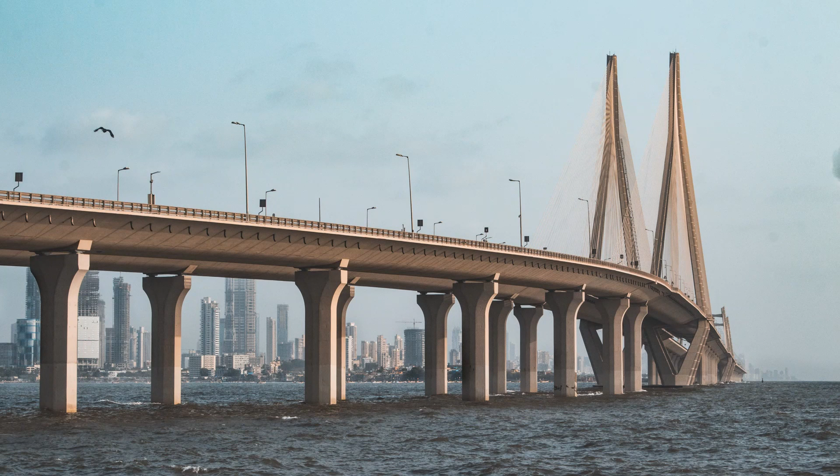For an outsider, basically what comes to mind after hearing the word Mumbai is Gateway of India, Marine Drive. But after the construction of Bandra Worli Sea Link, this structure is also one of the pictures that most people think about. And yes, Bandra Worli Sea Link is a masterpiece showing India's excellence in civil engineering.

Before starting the technical information, let me give you some brief about Bandra Worli Sea Link. Most people know this structure as Bandra Worli Sea Link, but actually its official name is Rajiv Gandhi Sea Link, or Rajiv Gandhi Setu. It connects Bandra in Mumbai's suburban region to Worli, in the south region of Mumbai, so it's popularly known as Bandra Worli Sea Link. This bridge is owned and maintained by MSRDC, the Maharashtra State Road Development Corporation, and this sea link is constructed by one of India's oldest and renowned companies, HCC, Hindustan Construction Company.

The design of the Bandra Worli Sea Link is done by the UK-based consultants for MSRDC, and for this project, the best experts from around the world contributed and worked on the design and construction at several stages. The sea link connects Bandra to Worli, crossing the Mahim Bay through the Arabian Sea. Construction started in the year 2000 but actually accelerated in 2007 and was completed in 2010.

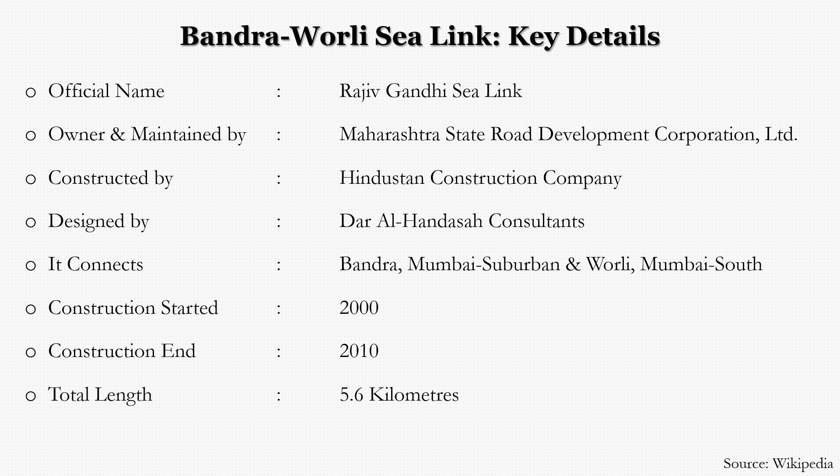The sea link is 5.6 kilometers long, which reduces travel time between Bandra and Worli during peak hours from 20-30 minutes to just 10 minutes.

Before I start the construction engineering aspects of the sea link, let me explain why this bridge is so important for covering a long distance in Mumbai's traffic in a short interval of time.

Mumbai is the capital of Maharashtra and the financial capital of India, and its central business district area is South Mumbai. But as urbanization happened over the last 50 years, people from all around India came to Mumbai, and because of the high price of land and lack of land in the Mumbai South region, people started living in the northern side of Mumbai and traveling daily to Mumbai South.

Therefore, the traffic in Mumbai from north to south is increasing day by day. In Mumbai, major traffic is handled by the Western Express Highway and Eastern Express Highway, with the Western Express Highway catering to 70% of the traffic. In the Mumbai suburban region, only Mahim Causeway is the road through which all travelers travel from Mumbai Western suburban to Mumbai South, and this road is always marked by heavy traffic.

So providing an efficient transportation system with minimum travel time was one of the major aims of this project, and the Bandra Worli Sea Link became one of the most highly recommended projects of all transport studies done for metropolitan regions.

So finally it was decided to build a sea link through the Arabian Sea, crossing the Mahim Bay from Bandra to Worli with an almost straight alignment, motivated to reduce traffic and accidents on Western Express Highway. Now let's see the details of the complete project.

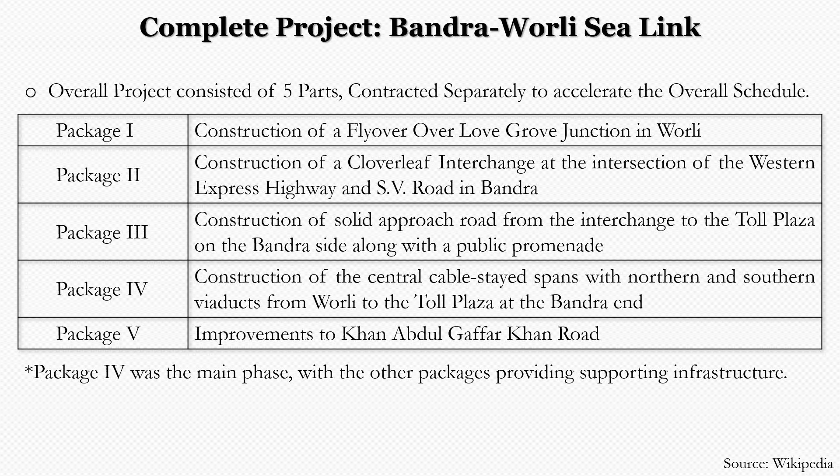The overall project consisted of 5 parts which were contracted separately to accelerate the overall schedule of the project. For ease of understanding, we'll see this on a map. Here is the part of the map of Mumbai, and here you can see all the parts of the project.

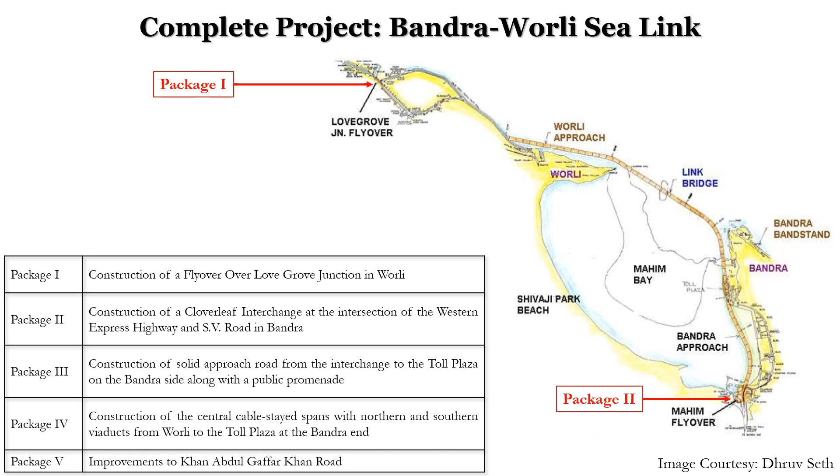Here it is, package 1 of the project, which is the Love Grove Junction flyover in Worli, 680 meters long and 8 meters wide. It is one of the big steps to the Bandra Worli Sea Link from the Worli side. Similar to the other side of the sea link, there is a Cloverleaf interchange at Mahim intersection, which is package 2 of this project.

The third package of this project is a solid approach road from Mahim interchange to Toll Plaza on the Bandra side, along with a public promenade. The main package of this project is package 4, which is the construction of the central cable-stayed spans with northern and southern viaducts from Worli to Toll Plaza at the Bandra end.

The fifth package of this project is the improvement to the Khan Abdul Gaffar Khan Road, which is from the Worli end of the sea link.

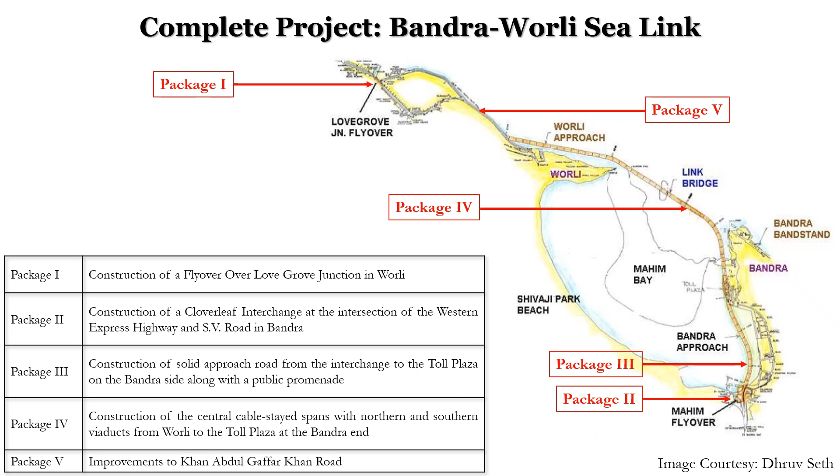Now let's see about the design of the Bandra Worli Sea Link. The design was consulted by DAR Consultants for MSRDC. The bridge is designed in accordance with IRC codes, that is Indian Roads Congress codes, and specifications conform to IRC standards, with supplementary specifications covering special items. The bridge is designed and built to withstand wind ranging up to 125 km per hour over the Arabian Sea.

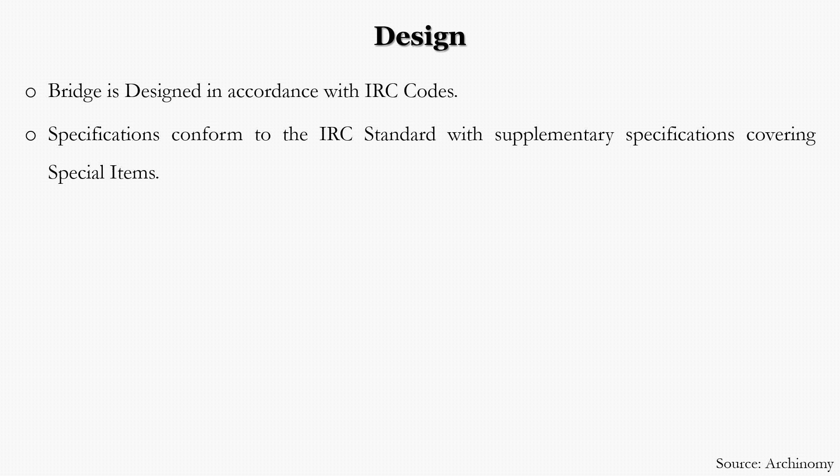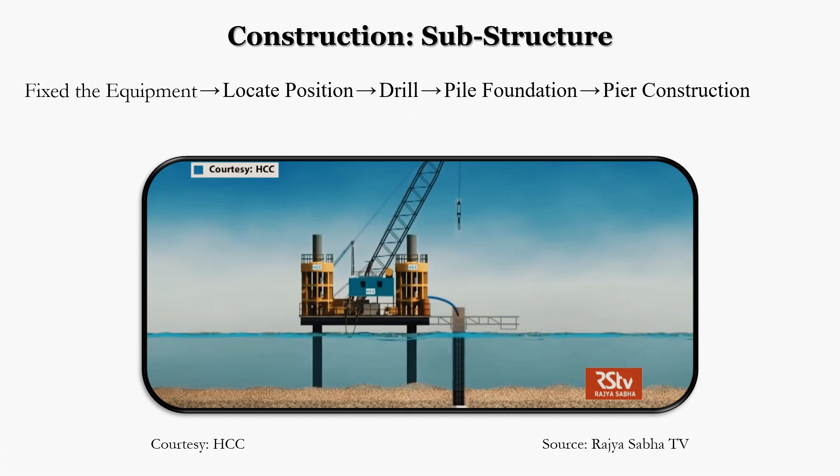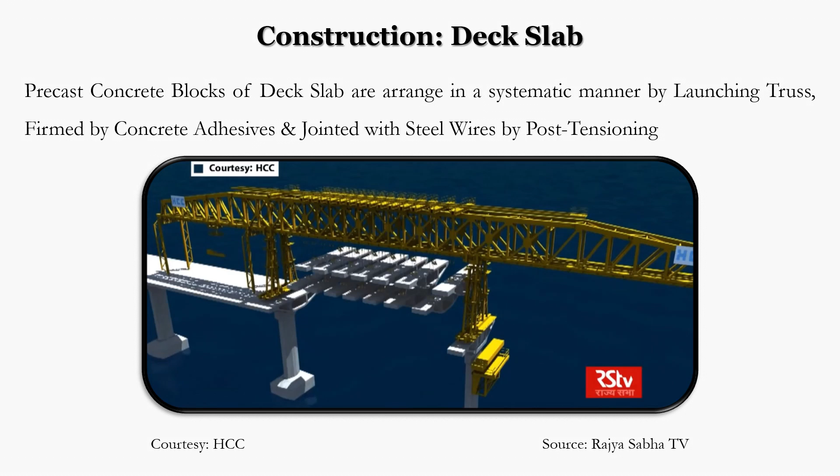Once the forward pier is constructed, prefabricated concrete blocks are laid by the giant launching trusses. There are a total of 15 segments of precast concrete blocks laid between two pillars, and these blocks are joined by concrete adhesives and steel wires through post tensioning.

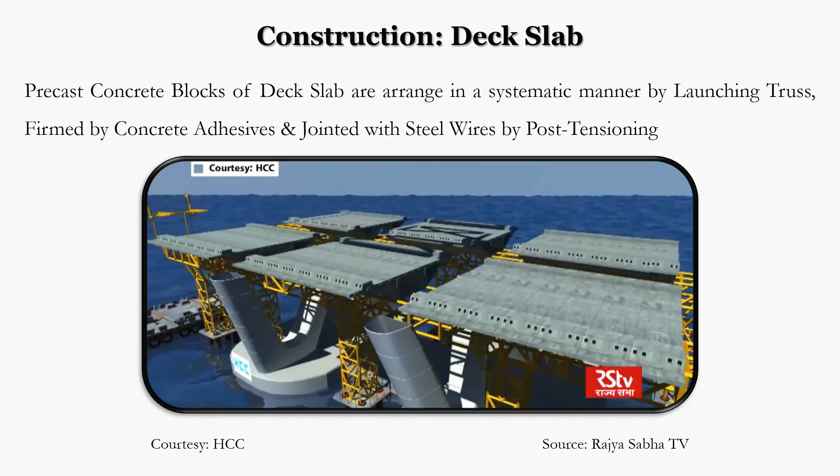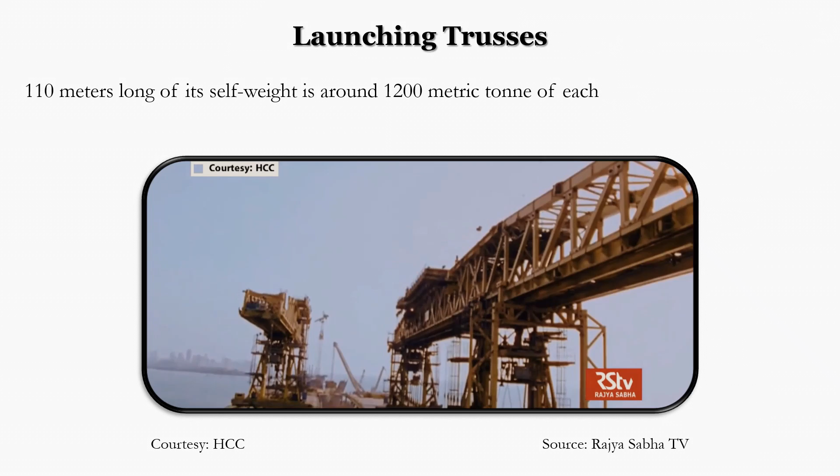Launching trusses have been assembled and calibrated to a high degree of precision. These launching trusses are 110 meters long and their self-weight is around 1200 metric tons each. These trusses crawl mechanically on the surface after the portion of deck is completed.

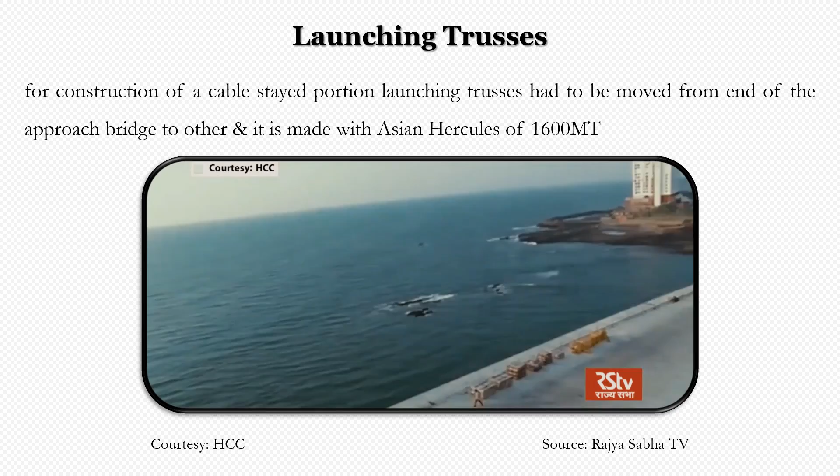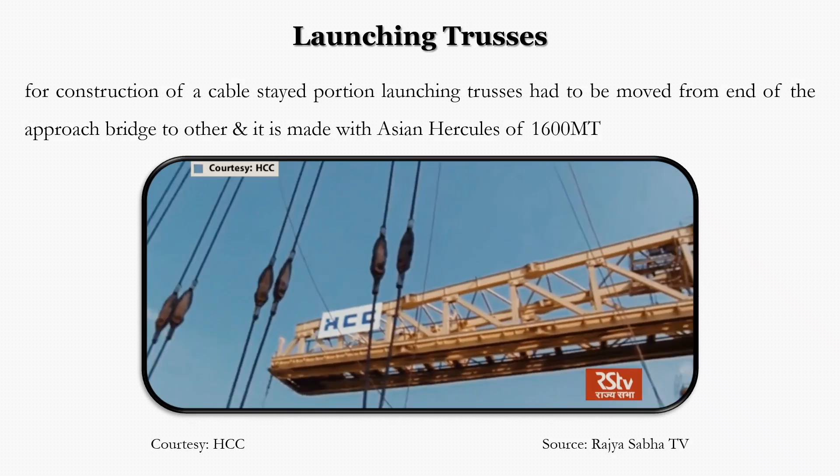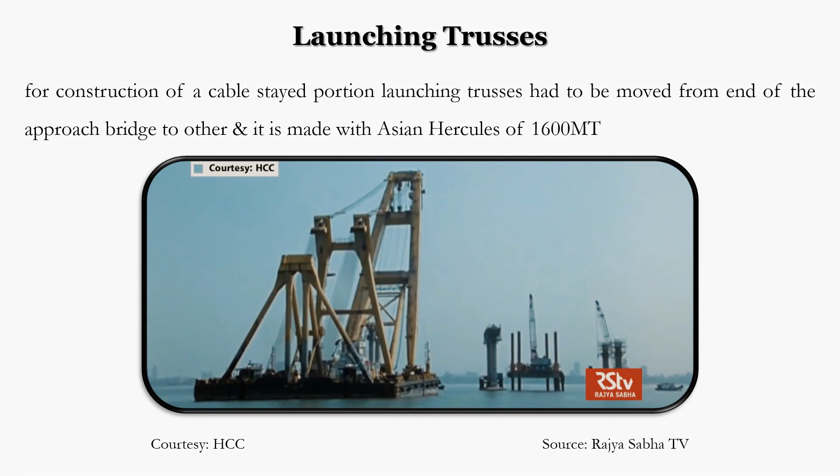But for building the cable-stayed portion of the bridge, these launching trusses had to move from one end of the approach bridge to the other, because the distance between the end pillar and the central pillar of the cable stay is 250 meters. This was a massive challenge, moving a 1200 metric ton launching truss from one position to another. HCC achieved this with the giant Asian Hercules, one of the biggest shear leg cranes in the world, which can lift up to 1600 metric tons. That made the task much easier for laying the two 250-meter-long decks of the cable-stayed portion of the bridge.

The cable-stay portion of the Bandra Worli Sea Link makes the structure more aesthetically pleasing. The sea link has two cable-stayed portions. The larger cable stay, close to the Bandra end, has approximately 600 meters of span with two clear channels of 250 meters each. The smaller cable stay at the Worli end has approximately 350 meters of span with a clear channel of 150 meters.

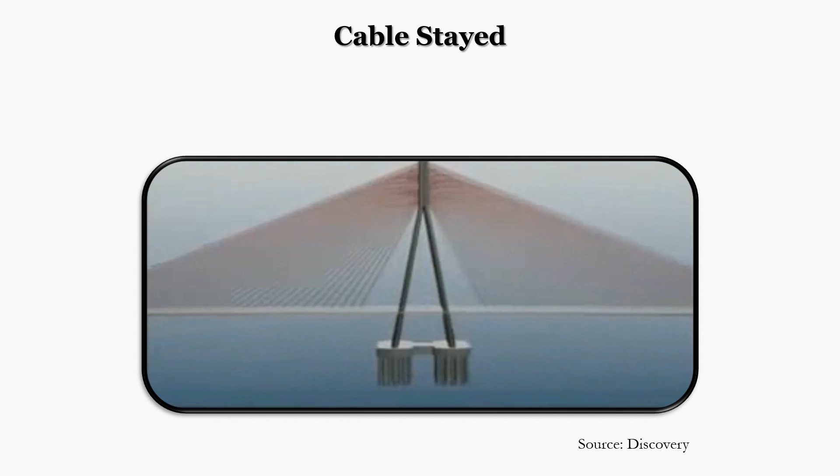Both portions are designed with absolute precision, keeping in mind dimensions, geology, and aerodynamics. In India, the Bandra Worli Sea Link is the first ever bridge over the sea to use the cable-stay technique for construction. For a clear understanding, let me explain the structural mechanism behind the cable-stay bridge.

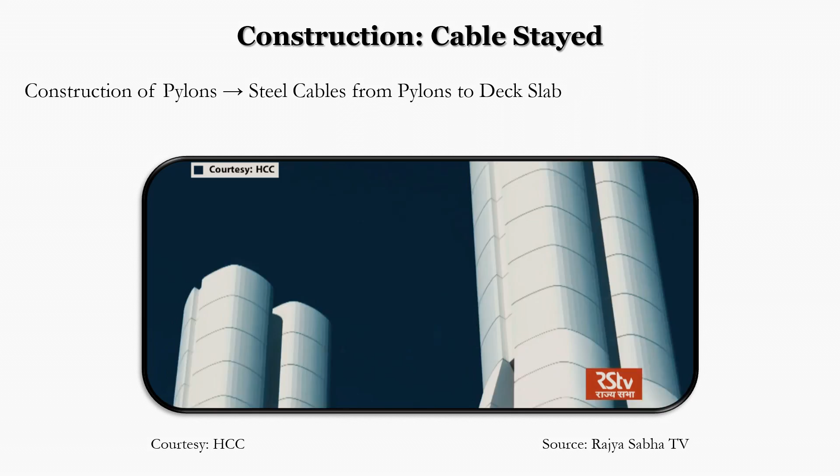It is basically pylons from which cables support the bridge deck, and in this way, the cables generate tension forces. You can find the piers at the bottom of the superstructure, but they are only supporting. What actually holds the deck are the steel cables from the pylons, and this is how the structural system works.

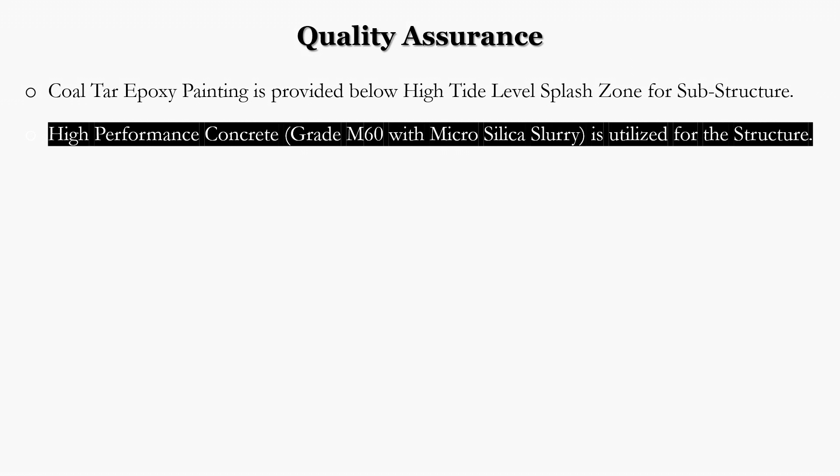Now let's see the factors considered for the quality assurance of the construction of the Bandra Worli Sea Link. For the substructure, coal tar epoxy painting is provided below the high tide level splash zones, while high performance concrete grade M60 with microsilica slurry is used for the construction of the structure. For the deck of the bridge, a 40mm thick high performance overlay is provided over the prestressed deck to function monolithically with the deck.

People from different organizations worked on the Bandra Worli Sea Link. MSRDC, the Maharashtra State Road Development Corporation Limited, is the owner of the project. Design was done by Dar Al-Handasah Consultants and Jacobs Engineering Group Incorporation. Geotechnical engineering work was done by Lachel Felice and Associates Incorporation. The sea link was constructed by one of India's oldest and most renowned construction companies, HCC, the Hindustan Construction Company. Expansion joints were handled by Mageba, a Swiss company providing civil engineering services, and launching was done by Freight Wings Private Limited. In addition, many others were also involved in the whole construction of the Bandra Worli Sea Link.

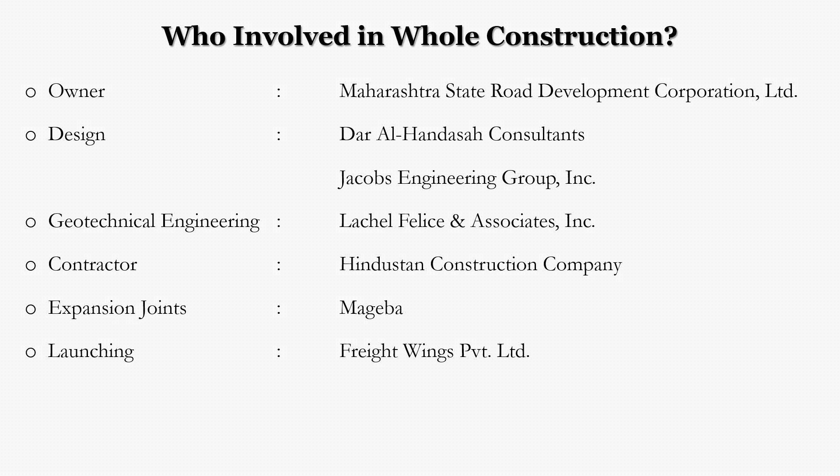So this is all about the construction of the Bandra Worli Sea Link. Now let's see the benefits of the project.

Although this sea link helps save time from busy and heavy traffic roadways, there are also other benefits of this project. There is a reduction in the chances of road accidents because of the almost straight alignment of the road and wider roads.

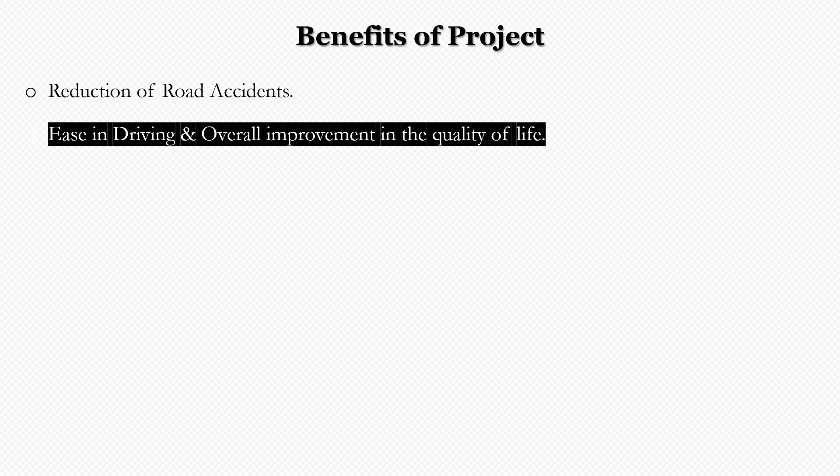Ease in driving with reduced mental tension, along with overall improvement in quality of life. Savings in vehicle operating cost to the tune of rupees 100 crores per annum due to reduction in congestion of existing roadways and lower vehicle operating cost on the bridge.

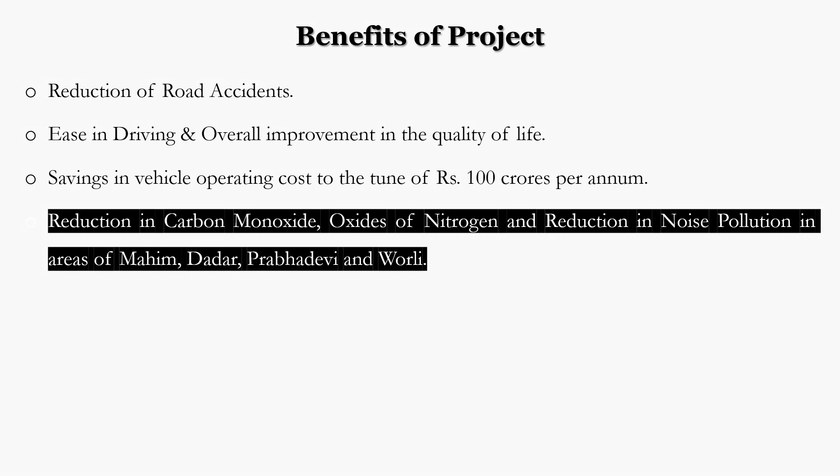Improvement in the environment, especially reduction in carbon monoxide and oxides of nitrogen, and reduction in noise pollution in areas of Mahim, Dadar, Prabhadevi, and Worli. This project has no adverse effect on the fisheries, marine life, and livelihood of fishermen. Lastly, proper landscaping measures along the approaches and promenade along the waterfront to enhance the environment of the area. Now we'll see about the bridge management system on the Bandra Worli Sea Link.

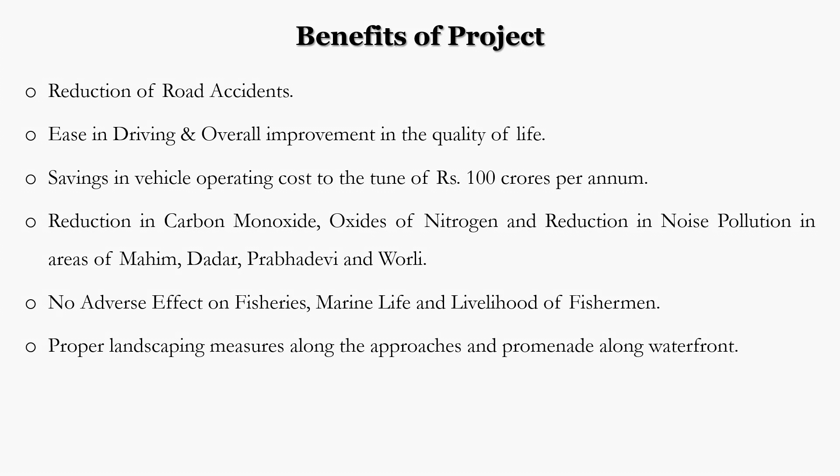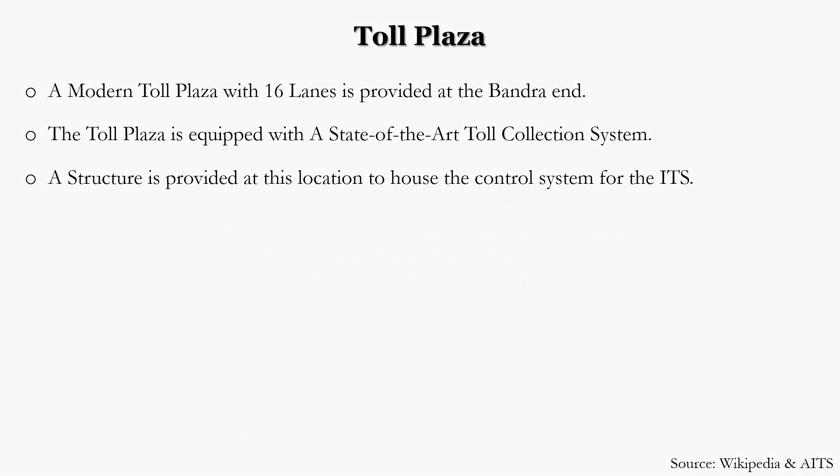For the toll plaza, power supply and lighting, and surveillance and security - first let's see about the toll plaza on the Bandra side. A toll plaza of 449-meter long embankment with 16 lanes is in operation for collection of tolls, equipped with state-of-art toll collection system. A structure is provided at this location to house the control system for the ITS, while the toll station and collection system will provide for three different types of toll collection.

The first is a fully automatic system, with electronic payment through onboard units mounted on vehicles, allowing passage without stopping. The second is a semi-automatic system, with electronic payment through smart card, allowing payment without cash. The third is manual toll collection, with payment by cash, requiring vehicle drivers to make a cash payment to a toll attendant and stop for the cash exchange.

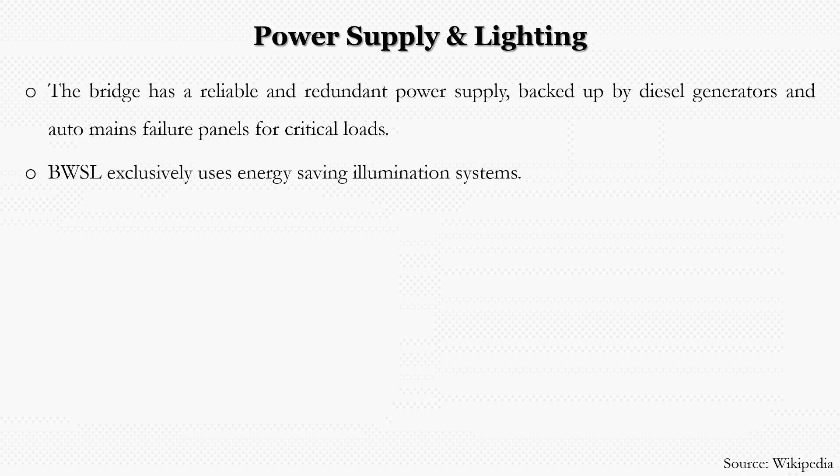For power supply and lighting, Bandra Worli Sea Link exclusively uses energy-saving illumination systems. The bridge has a reliable and redundant power supply, backed up with diesel generators, and auto mains failure panels for critical loads.

For surveillance and security on the Bandra Worli Sea Link, an intelligent bridge management system provides traffic information, surveillance, monitoring, and control systems. It comprises CCTVs, automatic traffic counters, vehicle classification systems, variable message signs, remote weather information systems, and emergency telephones. The bridge tower and control centers feature lightning protection, designed to protect bridge monitoring, communication, and power equipment from possible surges.

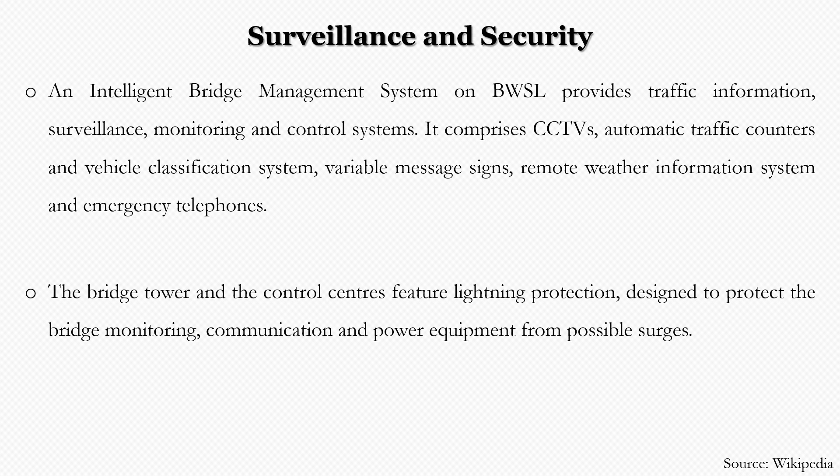Inaugural ceremony of the Bandra Worli Sea Link was held on 30th June 2009, presided over by the chairperson of the UPA, Smt. Sonia Gandhi ji, Agriculture Minister Shri Sharad Pawar Sahib, and Chief Minister of Maharashtra Shri Ashok Chavan ji, along with other chief guests.

The first 4 of the 8 lanes of the bridge were opened to the public on 30th June 2009, and all 8 lanes were opened on 24th March 2010.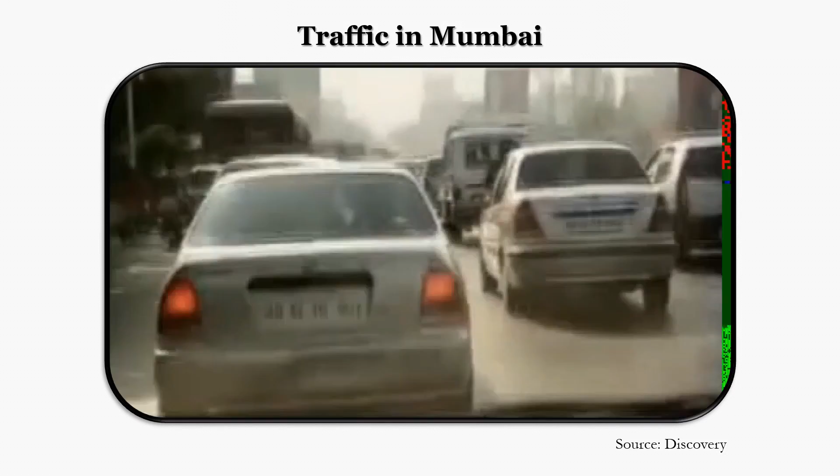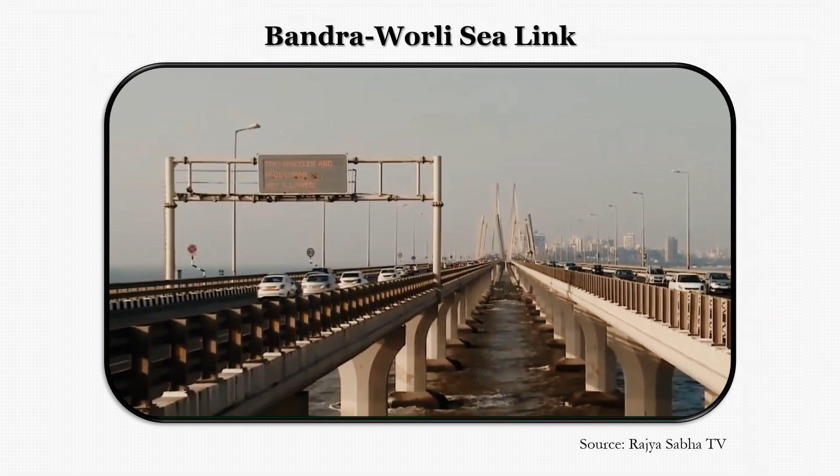Ask somebody who has been in Mumbai before 2010 - they are witness to how difficult it was to travel between Mumbai South and Mumbai Western Suburban region because of traffic and the lengthy route, and the whole effort involved in driving. The moment this bridge was inaugurated, travel time decreased along with reduction in chances of accidents due to shorter distances and wider roads, and easier driving with reduced mental stress and improvement in quality of life.

This sea link is part of the first phase of Mumbai's freeway system designed to ease traffic, with the project yielding favorable results and desired objectives in easing city life. Expect some more such sea links in the days to come.

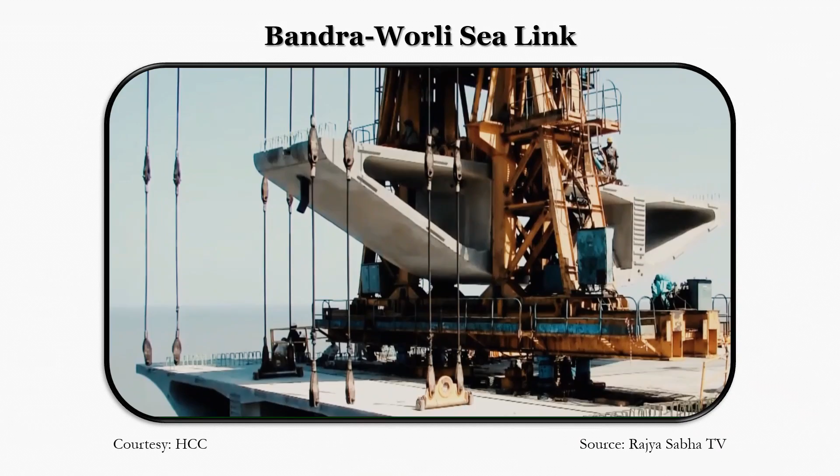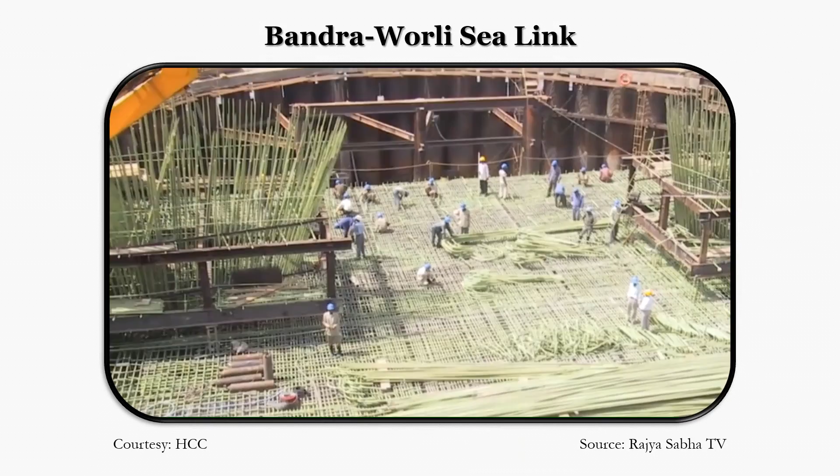For the construction of this bridge, there were a total of 3,000 workers from all around India, nearly 150 engineers, and numerous professionals and experts from nearly 12 countries who collaborated on this project with one thing in common - the laws of engineering - that brought them together to achieve a great masterpiece in India's city of dreams, Mumbai.

Today, Bandra Worli Sea Link is one of the identity marks and a marvel of engineering technology for the city of Mumbai, which really helps cover a long distance in a short time. And no doubt, this sea link is a masterpiece, showing India's excellence in civil engineering.